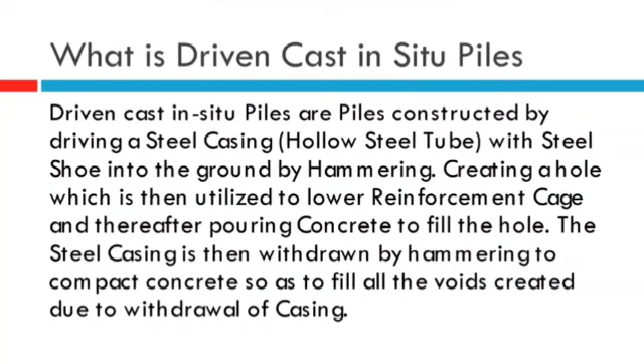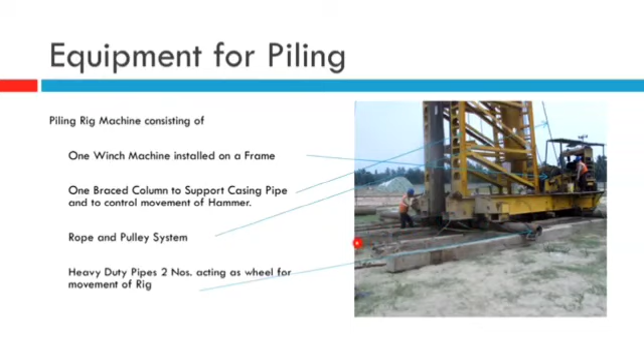So next, the rope and pulley system. This is the rope and pulley. The operator alone can operate that system. Heavy duty pipes, 2 numbers, act as wheels for movement of the rig, because after completing a pile you may move 5 meters or 6 meters. So how will it move? Through those 2 pipes.

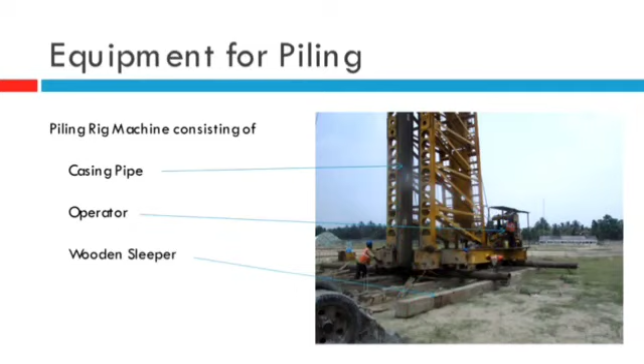The pile rig machine consists of a casing pipe, operator and wooden sleepers. You can see this is the wooden sleeper, and above that wooden sleeper the rig is standing, and operators are always sitting in that portion, and this is the casing pipe which is to be inserted below the ground. So first of all, the pile point has to be given.

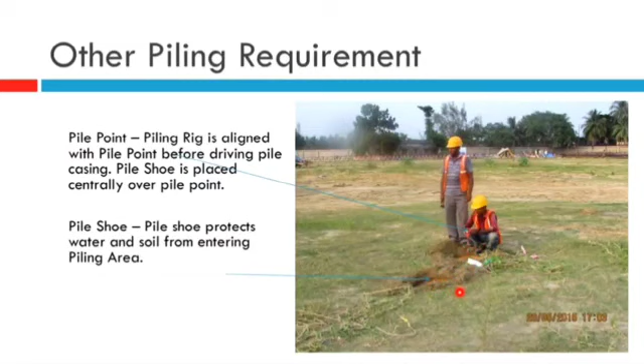The piling rig is aligned with the pile point before driving the pile casing. Obviously the pile shoe is placed centrally over the pile point, so the surveyor has to give that point where our pile is required. Above that point you have to fix one pile shoe, and the casing pipe has to be seated above that pile shoe. This is the picture of the pile shoe.

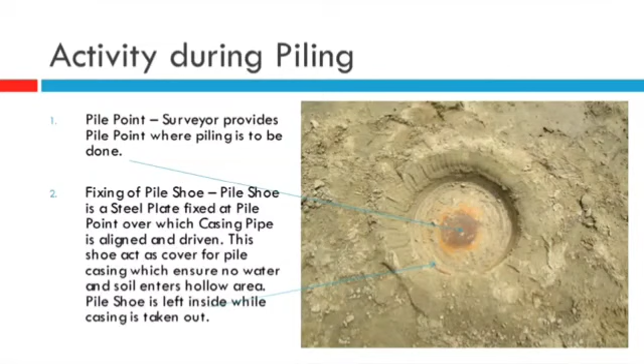The pile shoe is a steel plate fixed at the pile point over which the casing pipe is aligned, and then it will start driving. This acts as a cover for the pile casing, which ensures no water and soil enters the hollow pipe area, and the pile shoe is left inside while the casing is taken out. So align the pile rig above that pile shoe; the piling rig is shifted over the pile shoe for driving the pile casing into the soil.

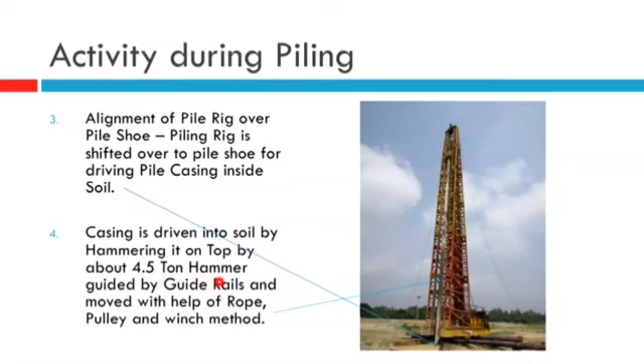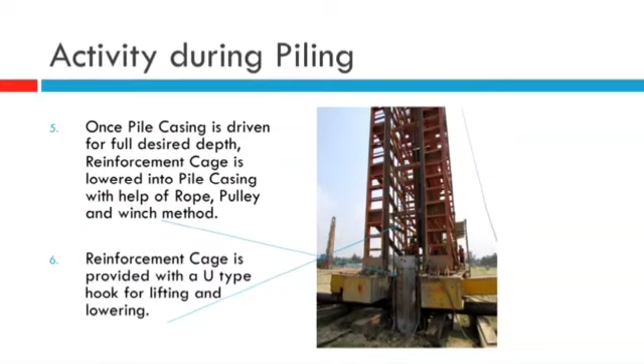Once the pile casing is driven to the full desired depth, the reinforcement cage is lowered. After completion of driving, the reinforcement cage has to be inserted from the top. If you require 20 meters, then the full 20 meter length has to be inserted into that casing. The reinforcement cage is provided with a U type hook for lifting and lowering. Once the reinforcement is placed, concreting may start.

A transit mixer is placed in front of the piling rig, and with the help of a chute, concrete is poured into the casing hole. If you have access, you can go directly with the mixer to that pile point. If you don't have access, then the concrete has to come to the casing through some pulling cart, and it has to be poured through the chute.

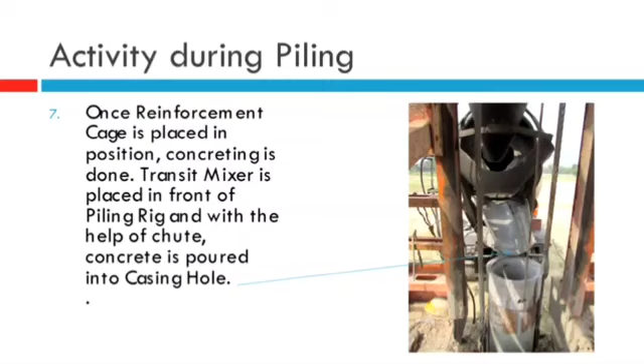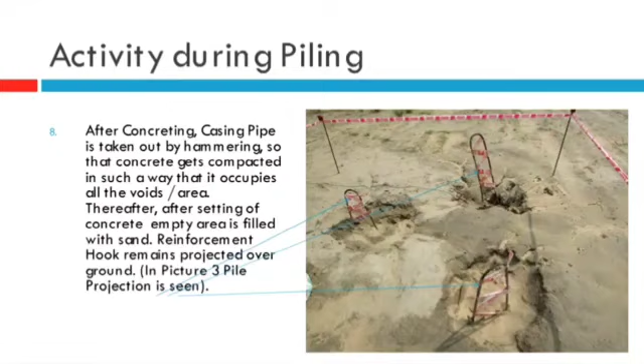After concreting, the casing pipe is taken out by hammering, so that the concrete gets compacted in such a way that it occupies all the void area. So after completion of concreting, the casing pipe has to be removed by hammering. Thereafter, on setting of the concrete, the empty area is filled with sand, and the reinforcement hooks remain projected over the ground, because you have to find them in future for breaking the pile head for doing a pile cap. So that's all. This is the concept of the driven pile.